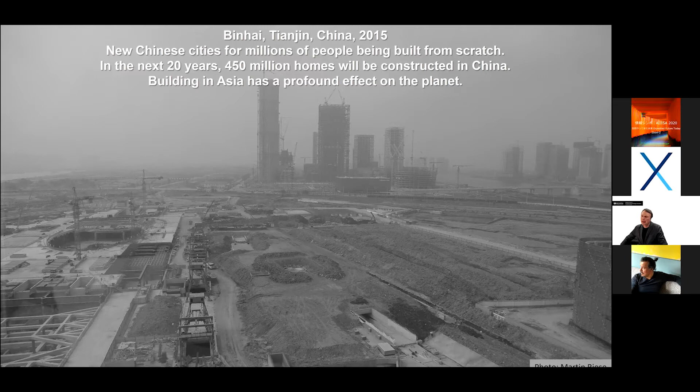Now, looking at what was just said, the development of urbanization and urban cities, for example in China or in Africa, is vast. It is immense what is being built there and what needs to be planned. And you see here that photo, it is not just made in a different color — it is really an environmental problem, not only building, housing, and offering living conditions for people, but how can we at the same time engage so that we cure our planet rather than just use our planet.

And that requires that we think differently. What is urban? How do we actually organize our city? How can we provide the housing for it? And how can we negotiate the nature around it?

We're using all computer, we're using digital media, we use software in this context. And what I think is really crucial is that we use technology not as a tool which executes things, but as a way of thinking about design.

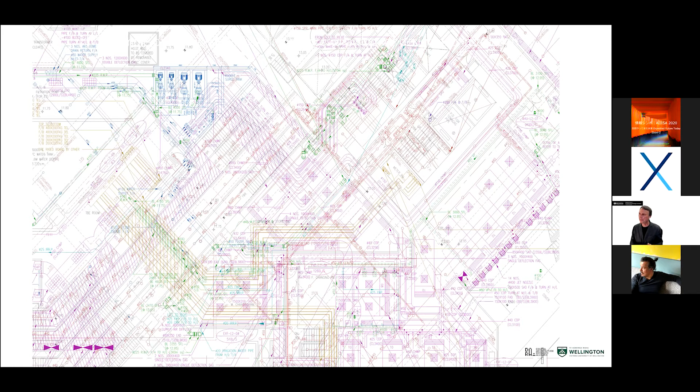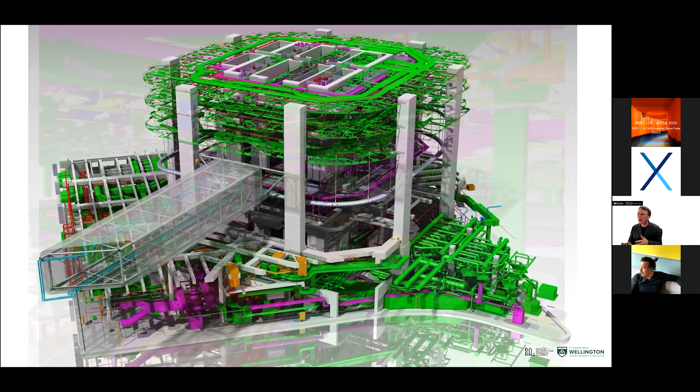These scripts and this computation generate plans which, from this viewpoint, are not legible to anybody anymore. So we now have to translate that, bring it into a virtual, three-dimensional environment to understand the building technology—how are the ducting, the pipes, the cables, how can I actually build and get everything together. I can go into a plan, into a detail level which in reality is not possible, and which on a typical representation—plan, section, elevation—is also not possible to really understand the complexity of what we design.

This is where I think we work with technology in a very different way than we earlier did, because we work three-dimensionally and can zoom into a level of detail which was earlier not possible, or just too time-consuming to produce.

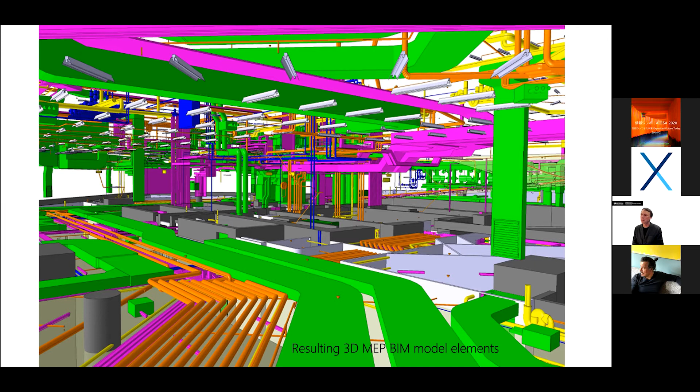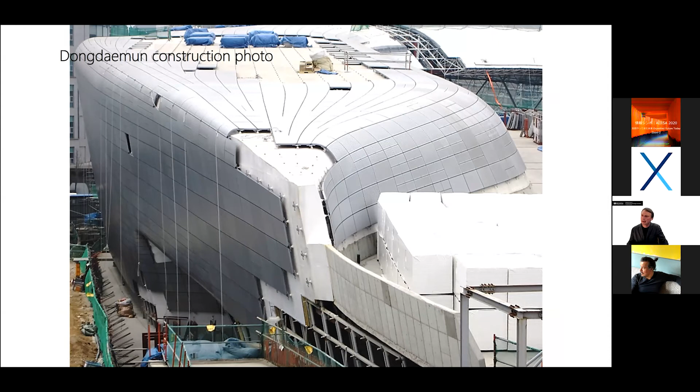So by that, we're producing different architecture, different elements. For example, here the construction of the Dongdaemun in Seoul, having this panel cladding—these panels are a very nice idea, but it generates 50,000 different panels, which are unique and each have to be fabricated and then put on site. This is too much work for one person to do.

So as a designer, as an architect, we not only design how it looks and want these panels, but we now have to design the machine which can produce these panels—and that is the machine which produces these panels. So we have an idea, we develop the code, we are the code writer, we are the person who develops the machine, and we develop a system where everything is put together. That changed very much the idea of what an architect is.

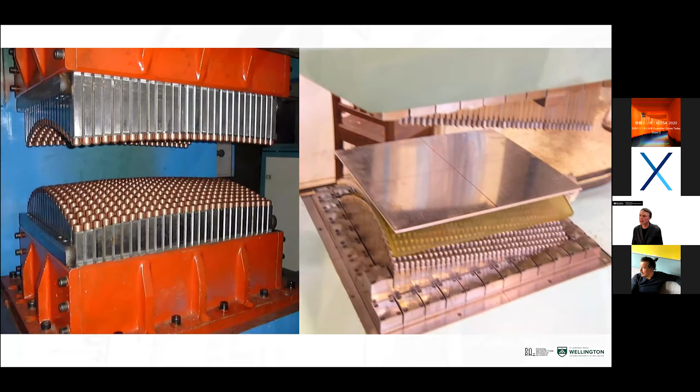At the same time, we have the human being, and that is actually the beauty. We develop this complex system, and we know how we do our ducting, our pipes, how we build, how we put things together. But say there's a small error, a new pipe—how do you now deal with it? Well, we just go through the window. We smash the window and go through it.

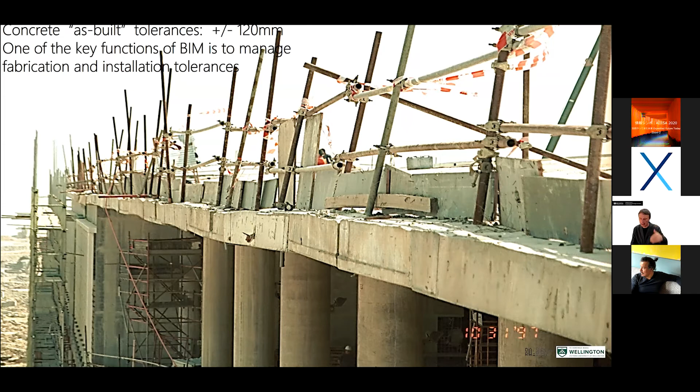And we are on the construction site. Again, we've designed something in the computer, in a digital environment, in an office far away from the actual place where people put it together at a very different skill level. And we get these tolerances here, for example, in that sample. We have to think about how we can design the system so that at the end it can work very well.

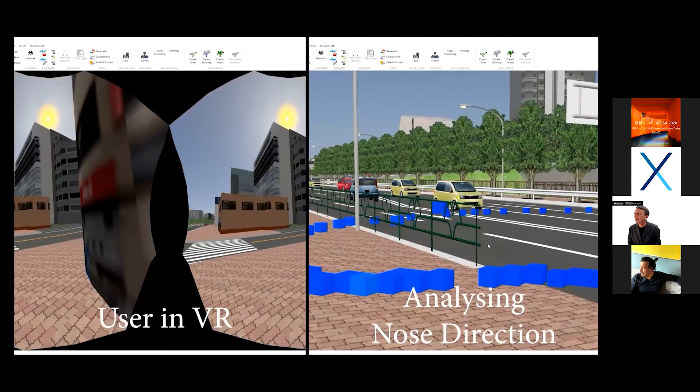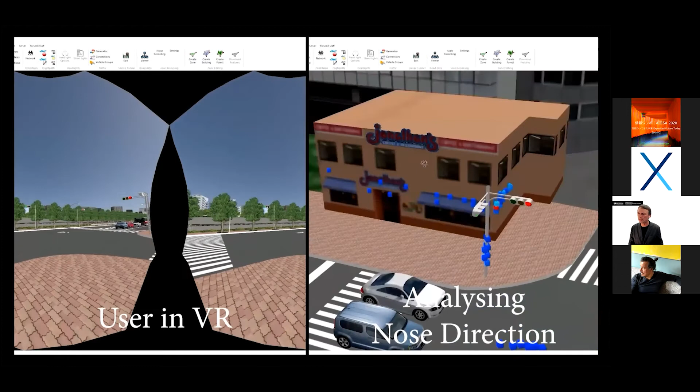That allows us to design differently. We can now evaluate our design, whether what we think should happen actually happens, rather than relying on assumptions. And that has importance in health and safety—how do we plan for roads and streets, how do we plan escape routes in buildings, how do we deal with our environment in this context.

Here again, we can generate a heat map on this intersection—when people stand there, where do they look? We can compare what's happening in a virtual environment versus the real one, and suddenly understand very differently how the city is actually used by citizens.

So what I argue for is not the Internet of Things as a very common term now, meaning gadgets and sensors which come together—that's the Internet of Things. I think it's more the Internet of Spaces: all the sketches, all the technology come together, talk to us, and we are part of it. It is a spatial exchange rather than an exchange of things, goods and sensors.

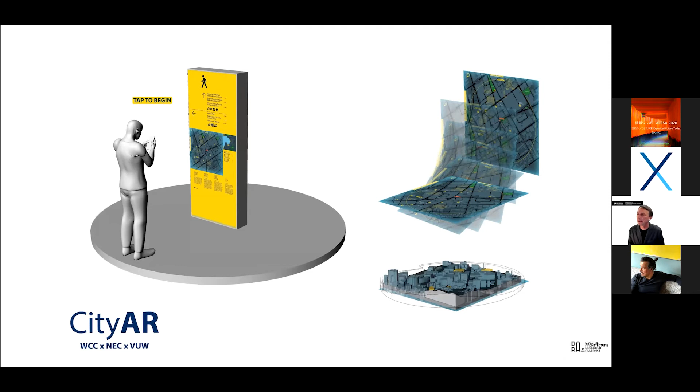Looking at the next project, CityAR—we all have mobile phones and devices sitting in the city to help us orientate from one point to another. Instead of looking all the time at your screen, which gives you the map and navigation as you walk from one point to the other, we asked: how can we use certain markers as the actual marker? You download it on your device and see it from a top view, not in elevation, because people who aren't architects need a different understanding of where it is.

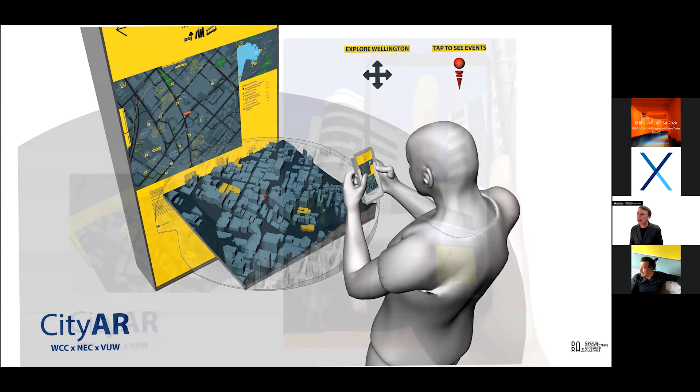They can mark the point where they want to go. Then, instead of being told all the time go right, go left, you hold up your mobile phone once in a while and get this large marker in the city, and you say, okay, this is the direction I have to go, and you find your own way there. It's a very different way of using a navigation tool—it doesn't tell you go right, go left, go straight. It just says, this is the general direction, this is where you want to end up, but explore the way to get there and be part of the city, looking at the city rather than only at your screen telling you right and left.

We presented that work, along with some other work, at Ars Electronica in Austria. Through the pandemic it could not happen at the location, so it became an online event.

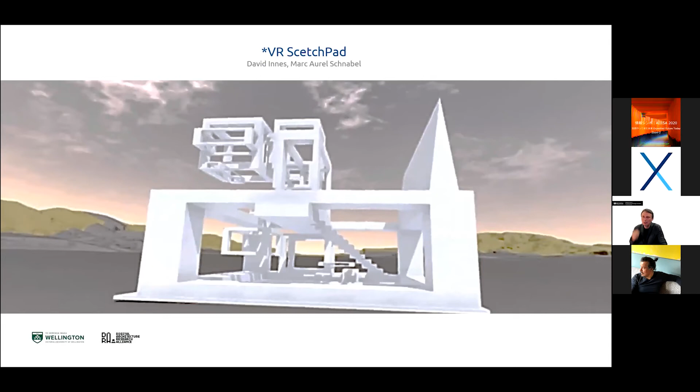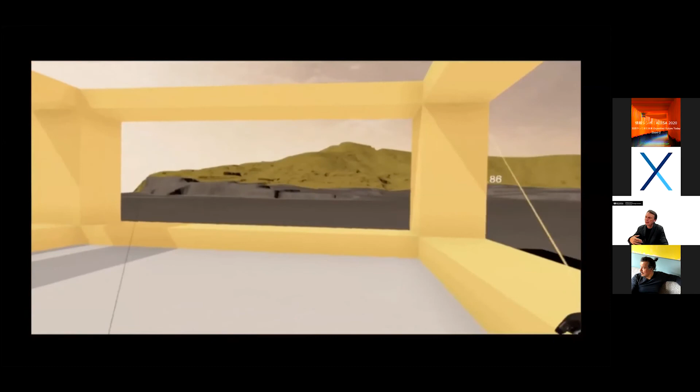Thinking of that engagement, we also developed a tool which is very simple for anybody to generate their own environment within VR. So you see here somebody is in VR, from their point of view, with a very simple tool where you can just generate objects and build the environment you want around you, in a one-to-one or more or less one-to-one scale.

This allows you, without being an architect or designer, to generate an expression of the space around you, which can then be interpreted by an architect or designer into what you actually want. It enables a very different engagement and discussion between the designer, the architect, and the client, or the architect and the engineer, about what you actually want to build.

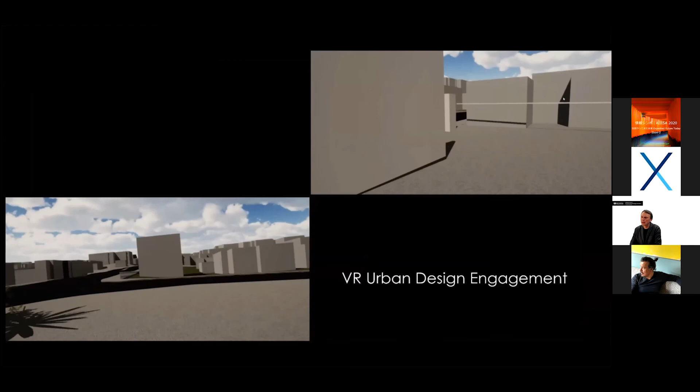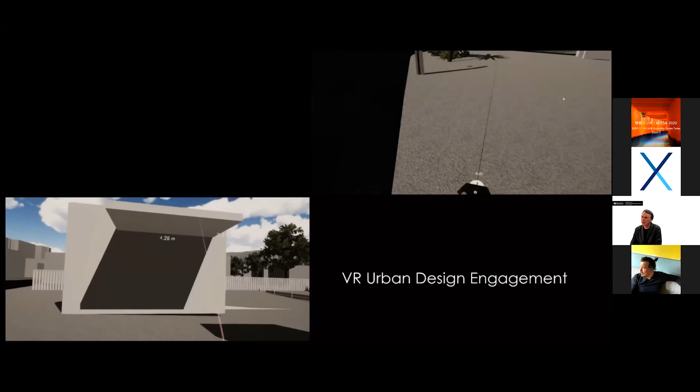Here you see that in a real urban context, where the city council wanted to build something and showed certain proposals, but people were not happy and didn't really understand. So we gave them that tool, and the citizens were able to design their own environment to a certain extent, giving that back to the city saying: look, this is what we actually think about our environment, we're living here—can we explore something in this way?

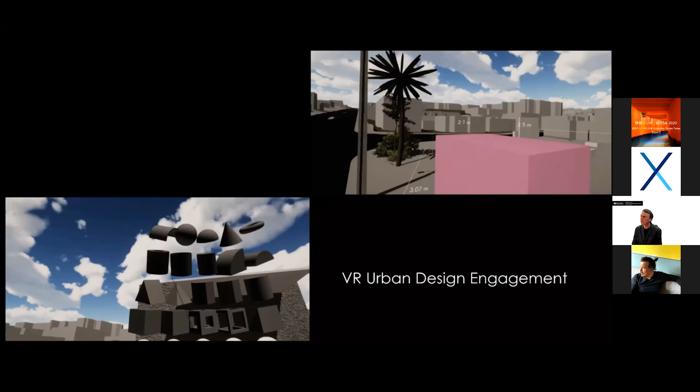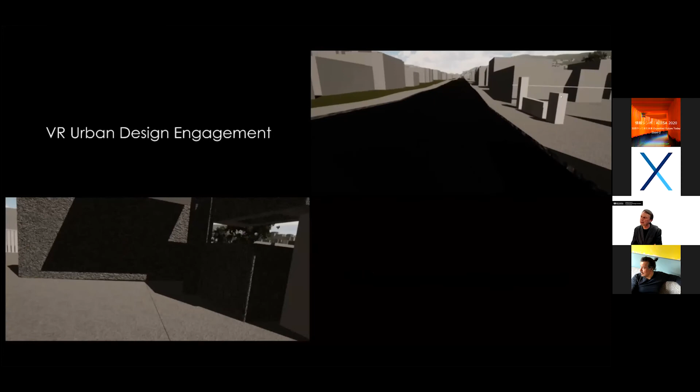So we allowed people to do things which were earlier not possible, without needing big training in architecture and design. It just gives them a voice so they can express what they want to do.

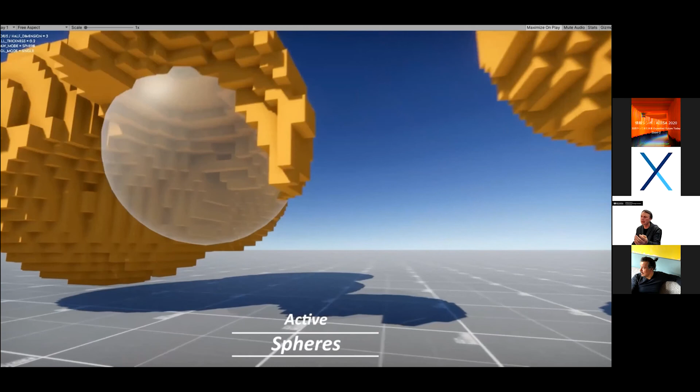Pushing that even further, we questioned how we design in the first place. Instead of using the hand or mouse, can we use our eyes, not only as a way to see, but to draw? What you see here is, by looking at places, I can draw with my eyes, because the eyes are tracked in this environment to generate or subtract form. It really questions the engagement of how I design and communicate with the digital instruments around me—I don't use my hands, only my eyes.

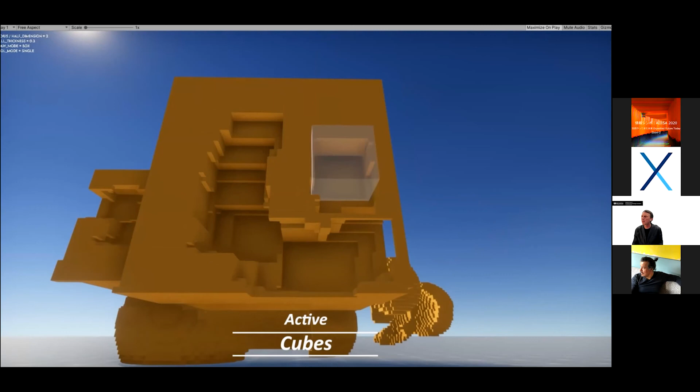That matches wearing a headset in VR where I don't see my hands. Just by looking at things, I can generate the design, the form, and know what I want to do. Now sure, this is a very crude moment, a prototype, and it doesn't give you the sophistication and detail a hand sketch can do, but it gives you the quick possibility to interact with the computer only using your eyes, and then work from there.

Now, if we look at more abstract terms, can we design sacredness or a religious context in a virtual environment, in a space which is not real? For example, in the Islamic faith, it's crucial that you orientate yourself towards Mecca, but in a virtual environment, there is no Mecca. So how can you practice that crucial element in an environment where that thing doesn't exist?

By learning from that, by learning the new interpretation, we can look back into reality and see how we deal with these elements, and how we can treat these resources differently.